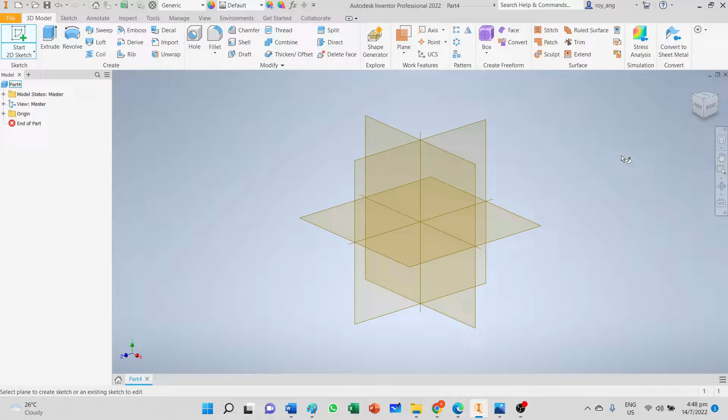Figure 7, question 3a. Create a new part — metric, standard, create. Then what I'll do is create a new sketch, the front view, drawing from here on this plane, and I'm going to rotate it across.

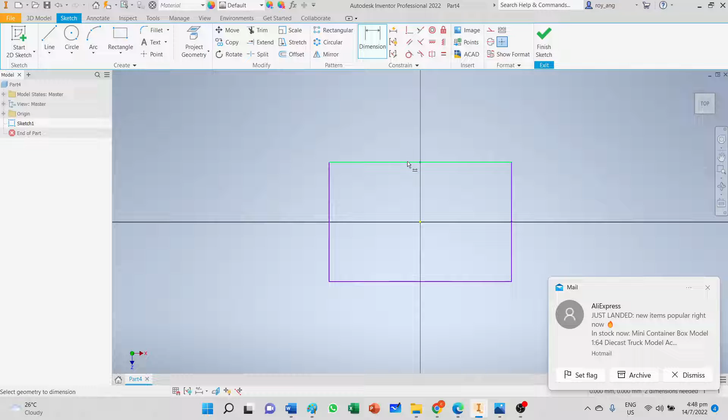I'm going to draw out a rectangle, centralize the rectangle, apply a horizontal constraint, and drop the width — the width is 90 millimeters, the length is 70. Enter, and I'll finish it off.

Then I will extrude — let's check the drawing, extrude height is 20 millimeters. From here to here is 20 millimeters, so I'm going to do just that, 20 millimeters.

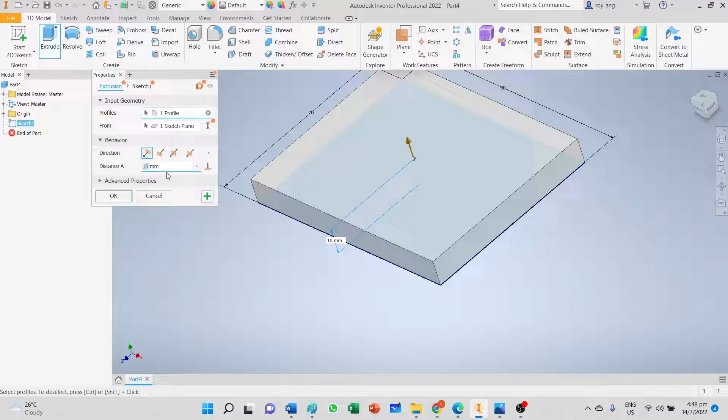There is a radius 20 on the front corners — right, it's here, here. Click OK.

Then I'm going to draw the step. This is the center point of everything, so what I can do is draw a rectangle, then centralize the rectangle to this, then ensure that this is collinear. This is another technique of drawing it — you can actually just draw 3 straight lines and it works just as well.

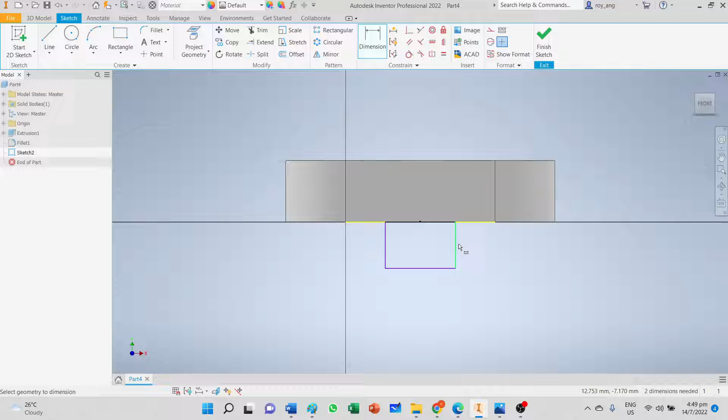The step height is 5 millimeters, the length is 16, so it's 16 and 5. I put here 5, and this is 16. Because I centralized it, even if you give a very large number, let's say 30, you'll notice that the rectangle adjusts itself and centralizes itself centered to the part.

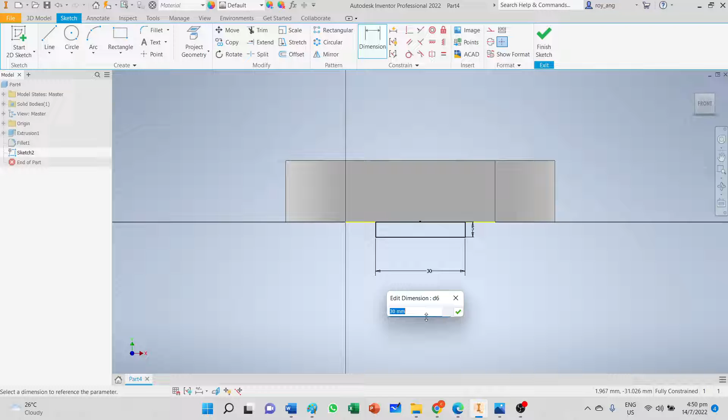Then what I'll do is finish this sketch and extrude it in the other direction, extruding to this back surface, and I'll click OK.

Next I'm going to draw this shape over here, the backing, and I'll include the radius 20 or diameter 40 — I'll show you how that is done. It stands at a height of 50 millimeters.

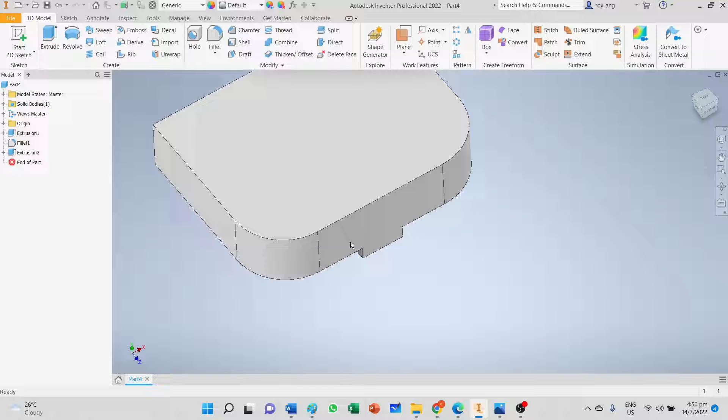It is centralized, so I will create a sketch on the back plane. This is the front, and I'm going to rotate to the back and create my sketch plane at the back.

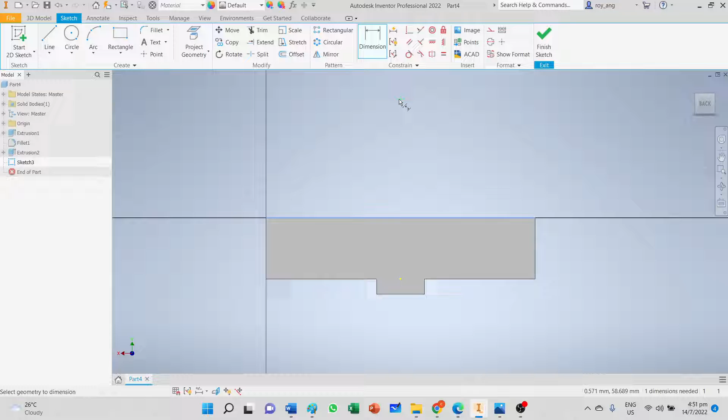Then I'll just draw a point so that it makes it easier, then align the point vertically to this axis. From this to the center of the point — what is that called? It's 50, right? So here 50.

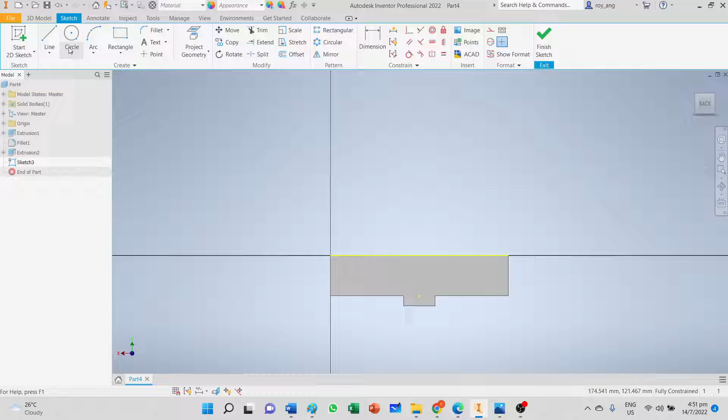Now that's one way to do it. If you find it too troublesome and you don't like this technique, what you can do instead is delete that away and just straight away draw a circle, and the diameter was 40.

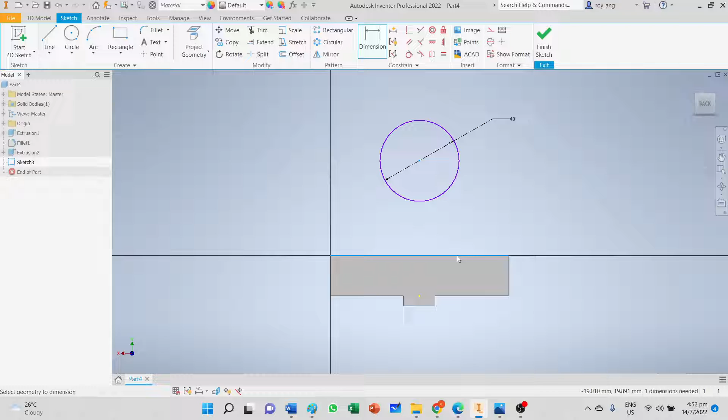Let's dimension it. Notice how I drew it off center - I didn't try to draw it at the center so that I can use my align tool. I'll align it vertically to this, and from here to here, it's 50. This works just as well, and it ensures that the circle is fully constrained.

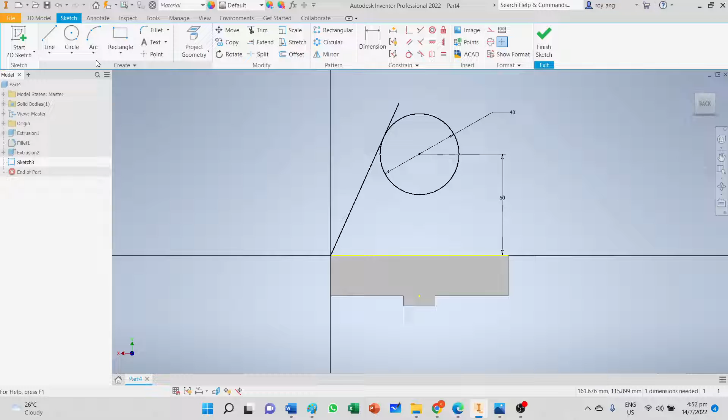Because it's turned black, then I'll draw a line. The line comes up here. I just put it to any length, and then I use the tangent constraint. I'll constrain it, then I can trim it away, or I can draw the other line.

As this is not too complex, I didn't bother with the mirroring effect. If there are a lot of features, I may consider drawing a short vertical line somewhere here, and then mirror my features over, but that's not necessary. So what I'm going to do is trim it, and this is how it is.

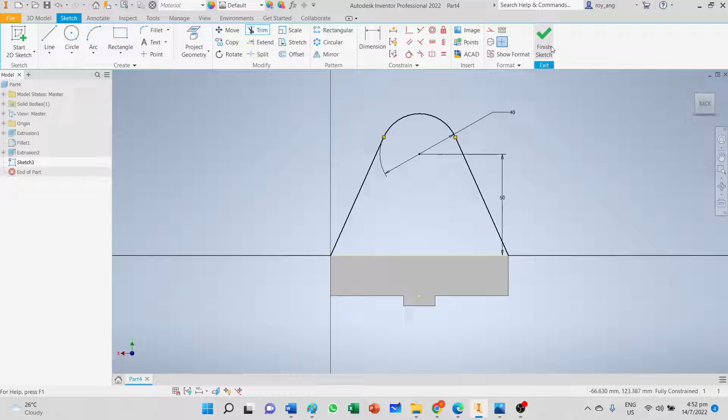Now I didn't draw a line at the bottom, because I have a projected geometry here, and it closes the loop. So I can extrude now - it's in the wrong direction. Extrude it this direction, and the width that I need to extrude is 20 millimeters.

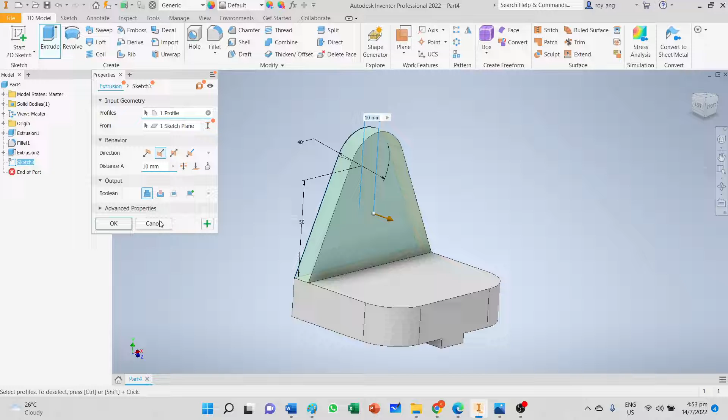20 millimeters. Then what I'm going to do is change this to 20, enter. Then the next thing I'm going to create is the protrusion, and it shares the same center as the top curve. So what I do is move my mouse over to the top curve.

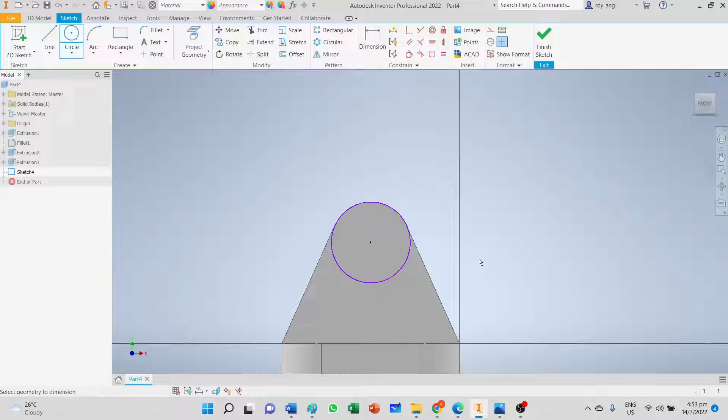The center, the dot appears - the center of the curve appears. I share the same center, and I'm going to hit it at 40 millimeters. Snap to here. Now it is still blue because I've not given it a definite 40 millimeters, and there it is. I will extrude it by 20 millimeters, so there it goes.

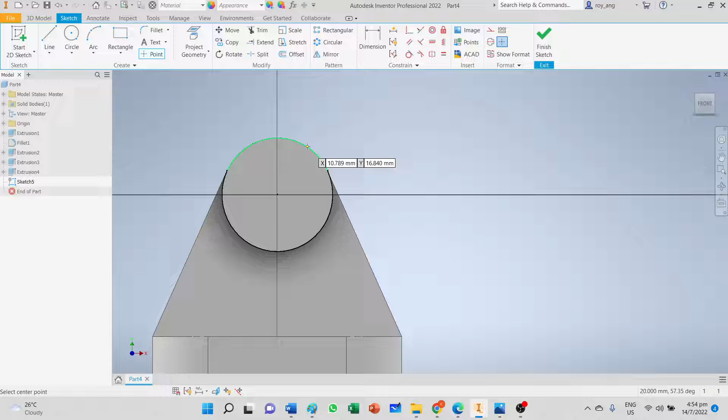Then the next thing I want to create is the hole type. I'm going to do it properly now. Create a point, move my mouse to the edge here, the center point appears, snap here, and that's finished. Then what I'll do is use the hole command.

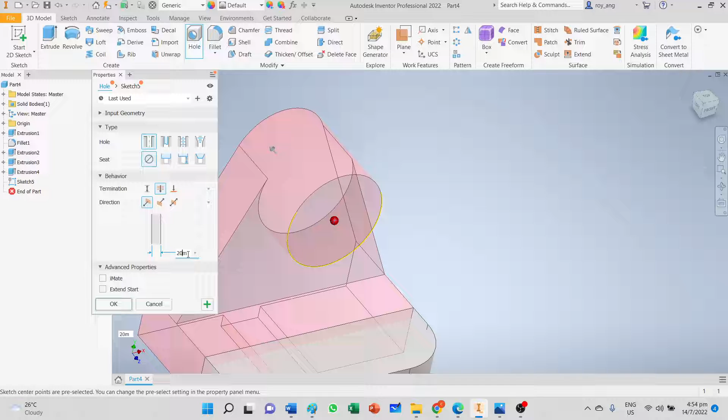Whoa, this is just too big. What's the hole diameter? Diameter 20. 20 millimeters. And I click OK - just to confirm that it is 20 millimeters.

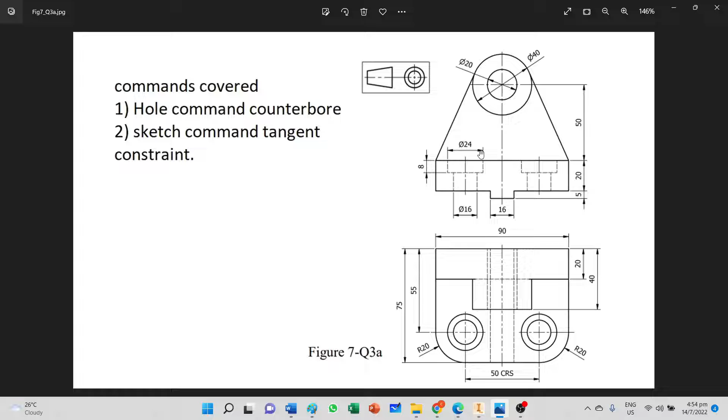Yes, that's right. The next thing I'm going to do, the last thing, is the counterbore holes - the counterbore holes with that. Critical dimensions are 24, 16, and 8. 24, 16, and 8, so let's try and memorize them. What I'll do is put a sketch out here, and then draw a point.

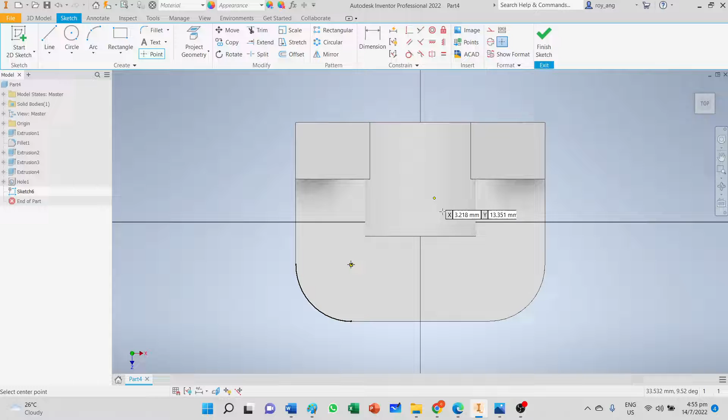Move my mouse close to the circumference of the radius, and the center of the radius will pop out. So I pop my point over there, move my mouse to the circumference, the curve, and the center will pop out. Then I have it over there. Okay, and I will create my holes.

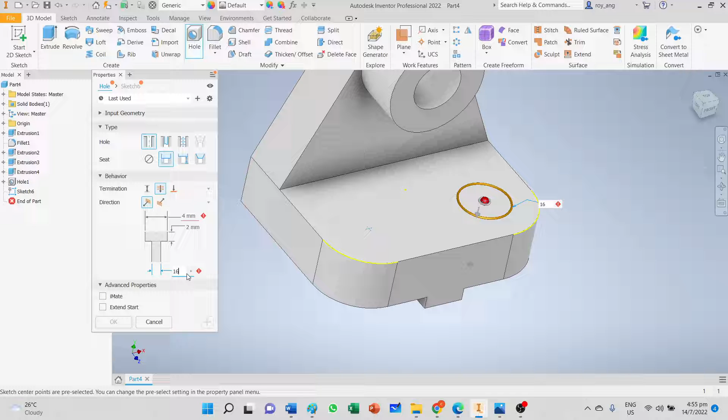Now this time round, it is not just a true hole, it's a counterbore hole. So the true hole, the one at the bottom, is 16 millimeters in diameter. The top one is 24, and it goes in by 8 millimeters. Okay, and you click OK.

Now, what is so fantastic about this counterbore menu is that with just a click on edit feature, you are able to edit all these features' dimensions, the counterbore dimensions, and it will automatically update itself.

If you were to draw it out and create it through extrude cuts, you will need to go to the individual extrusion, and if your part is really complex with many extrusions - 2, 3, 4, 5, 6 - it will be quite hard to identify which is the hole. Then when you change the diameter of this, you need to open up another extrusion to edit feature to change this, and another extrusion feature to change that.

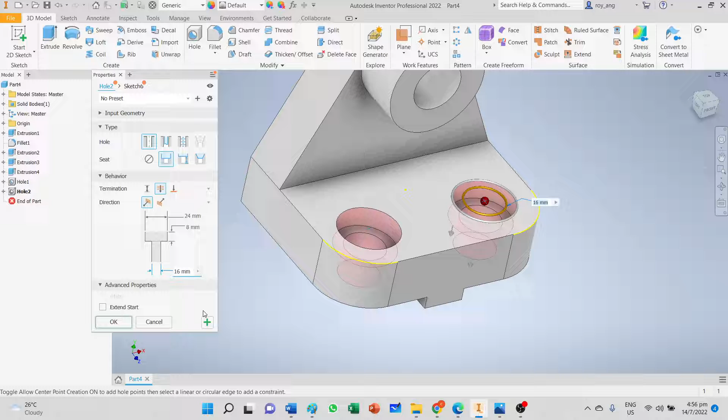But if you have the hole command, all you have to do is edit the hole feature, and you are able to tweak these three dimensions in one go, in one opening, in one setting. So that makes it really advantageous. You may not appreciate it right now - you may think it's a hassle going through all the dots and points - but in the future, when you are designing more complex parts with a lot more holes, the hole feature would be a blessing.

Okay, so with this, I click OK, and this is done. I need to save my file - save as - and this is figure 7 question 3a, figure 7 question 3a.